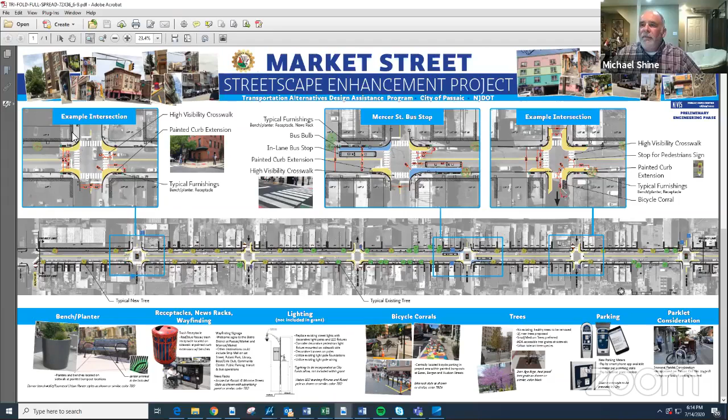What we did on this brochure, on this board, is we have an example intersection of the 2-way traffic. We have an example intersection of the 1-way traffic. And then there's a unique one here with the bus stop at the intersection. So we'll show you a typical of each one, and first we'll start with the 2-way traffic intersection. If I can zoom in here.

So the example intersection that we show here - a couple of the things that we looked at for this intersection is there's benches here. They're small in scale, but there's benches. There's trash cans at each corner. There's a planter, we'll get into the trees. There's also tree replacement up and down the corridor.

At this location, what's shown here with the yellow highlights are what we call bump outs. The purpose of the bump out is to reduce the crosswalk distance for people crossing. It's safer, and it also provides a traffic calming feel, forcing people to slow down through the whole corridor and providing more safety for pedestrians.

Charlie, if you want to jump in and add to that. Yeah, so what you're looking at on screen, in yellow, are the painted bump outs that Mike was talking about. You'll see on each corner we'll have a bench, a trash receptacle, and planters located on each one.

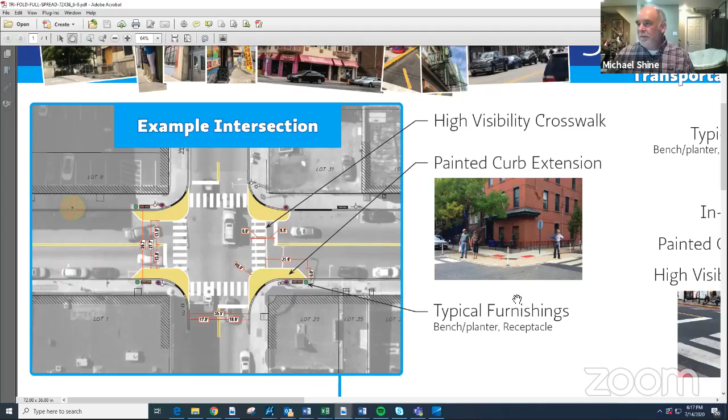And there's 3 locations that we have the two-way traffic. If we move over to the one-way intersection that Charlie was talking about, this is where the bump outs wrap around to the side street. These are a couple of the locations where we plan on putting some of the bike racks. It's off the main thoroughfare, so a little bit safer for the bicyclist, and the bump out can be used as a bike corral lay-down area as well.

Right now we're showing these bike corrals, that gray box, at 3 intersections, and in each case they're on a one-way street location, but they're spread throughout the corridor to provide opportunity at different locations for people. This one depicts about 8 to 10 bicycles, so at least we'll provide some storage, because the sidewalk area is so limited along Market Street that we're really trying to provide somewhere people can bring their bikes and not constrict the sidewalk in any way.

So you'll see this is one of the one-ways here where we have a bike corral shown as well. But again, here you'll notice there's furnishings at each corner, as well as new crosswalks and striping, and again, the curbing doesn't really change in these examples and what's proposed.

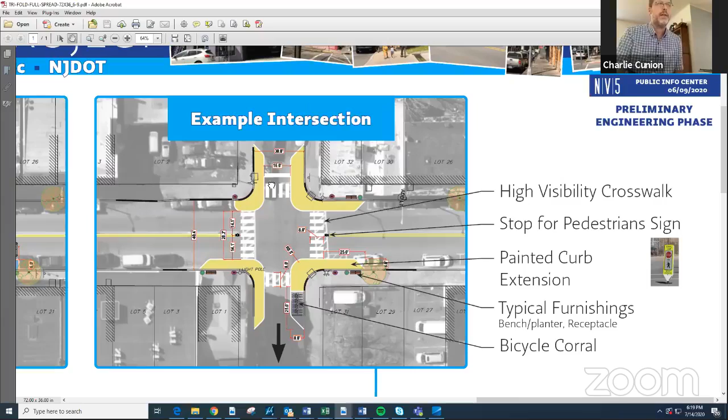The third example we have here is at Mercer Street, where there's a bus stop. On this side of the road, the existing bus stop is here. We're proposing to move it to the other side of the intersection, and also to have an in-lane bus stop as opposed to pulling over against the curb area.

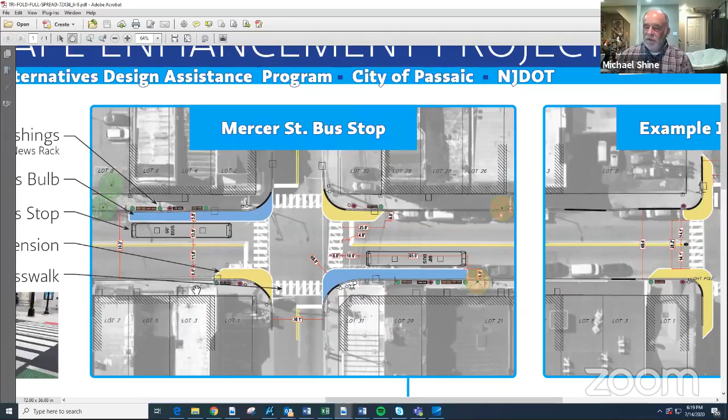The far side bus stop is a preferred stopping location, so that's the reason for the relocation of the southbound bus to the far side of the intersection. We're providing some additional space there for safety. Alongside the bus stop, there's a little more ample room for furnishings, which gives some breathing space for people on the sidewalk as well.

Again, you'll notice just the painted bump outs in this location. We've got a 2-way street for Mercer, so they don't really wrap around in this location.

One of the other things we want to mention is that as part of this project, at each corner of the intersection there are handicap ramps, ADA accessible ramps, and part of this project is to review them and make sure they're in compliance with the Americans with Disabilities Act guidelines. That has to do with slopes, the way slopes go from the road up to the sidewalk, and also where they're located for crossing the intersections. So that's another added piece of this project, to improve or bring up to standards any ramps that right now are insufficient.

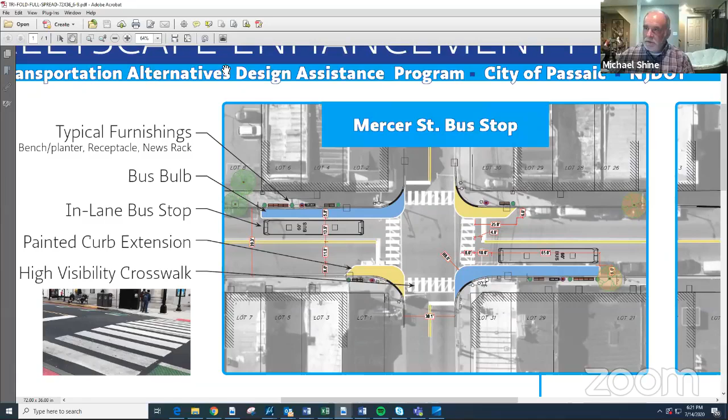If I expand back to the overall plan, the other thing is along the whole corridor—I'll zoom in this area—you'll see this series of trees. What we did is we went through, and there are a lot of locations where there's existing trees or at least box outs on the sidewalk for trees. Some of those spots are empty, some trees are fine and some aren't. As part of this project, we're looking to replant those areas that right now have either dead or empty spaces, no trees at all, and fill in the gaps to make it look uniform throughout the corridor, giving a natural look with trees and shade as part of rejuvenating the corridor.

I think there's several blocks like this one here that has no trees in it, and then other ones that have a lot. So we're trying to balance that out, and that'll be incorporated as part of this project. As I move through the corridor, you can see these orange circles are new trees, and the green are the existing trees. In these first two blocks, there's only one tree, so we're looking to add some of that to bring some color and rejuvenation to the corridor.

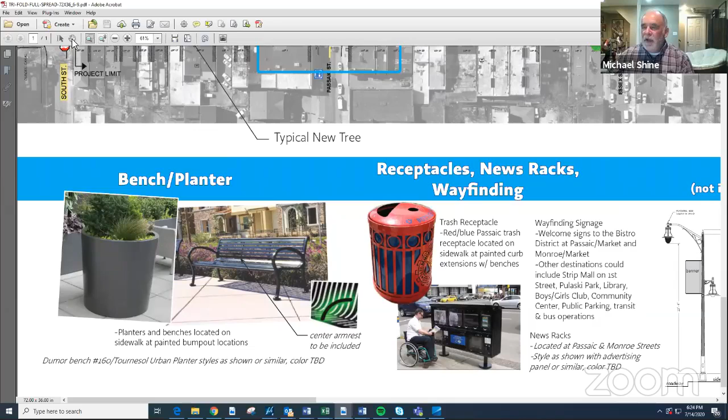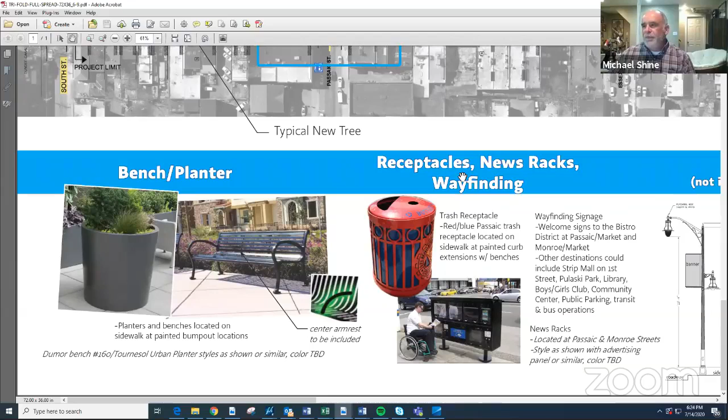Some of the site furnishings we've already gone through with the city, and again this is open for discussion. There's planters, some benches, and trash receptacles—there's some out there now that the city is standardizing. Really cool name to these, the Spider-Man cans we learned they're called, based on their color, which has the city logo on it, so we'll incorporate those to keep that consistency going through Market Street. For the news racks, the idea was maybe instead of having separate ones, have one that houses various newspapers instead of separate racks all along.

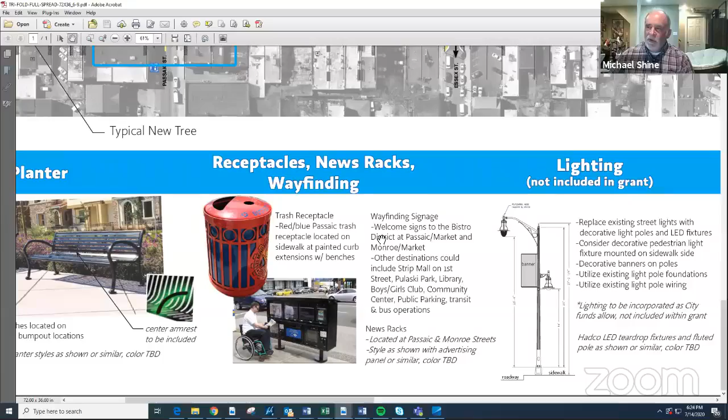There's existing lighting right now that is up to standards. We're looking at maybe adding some pedestrian lighting. Denise, you want to touch on that a little bit with the grant and how that works?

As part of the grant, there's a study to do lighting, and there was also some additional grants the city was looking at to upgrade lighting. We'd be looking at pedestrian scale lighting along the corridor. The roadway is already lit, and these would offer the opportunity to put banners or seasonal signs, to add some color to the area.

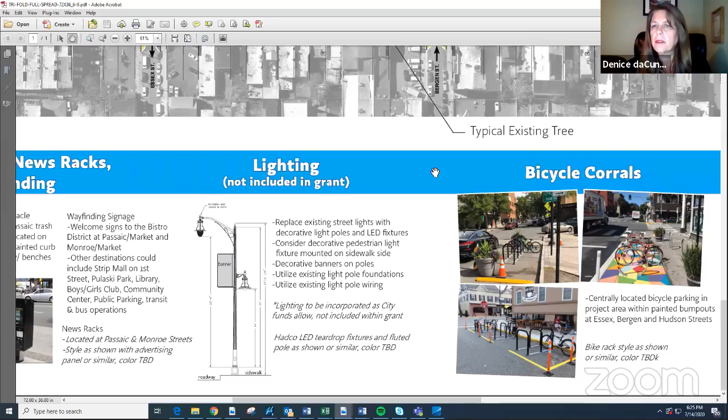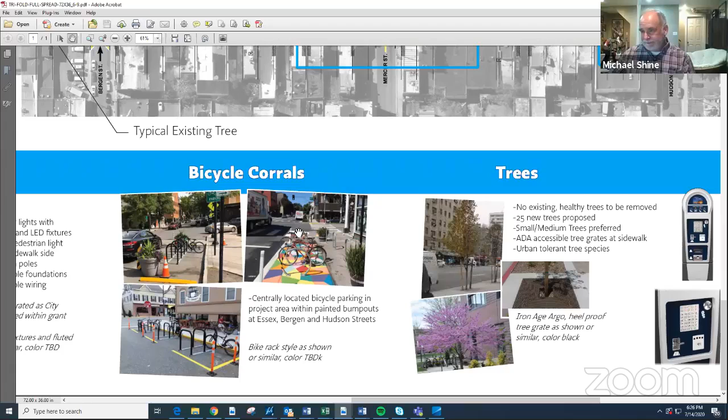And then the bike racks that we talked about at the various intersections on the side streets—there's a few different types, but that would be essential to this redevelopment. Other trees we talked about—again, there's some healthy ones, some not so healthy ones, and some that are missing.

The parking—I know the city is also in the process of redoing parking meters within the city, with a mobile app that would be in conjunction with these meters. So you would actually use your phone to go through and pay for the parking, as opposed to using cash, though I believe these have an option to still pay by cash. But the city's going to the mobile app, so we'll incorporate these to be consistent with the rest of the city improvements.

And then seasonal parklet consideration—before COVID it was seasonal, but now it seems like there's more and more of this happening, even on a temporary basis. So that's being considered by the design team to see ideal locations where that might be possible. Again, we're trying not to take away any parking, trying to keep safety, so there's a lot that goes into the consideration of the location and also what furnishings are used.

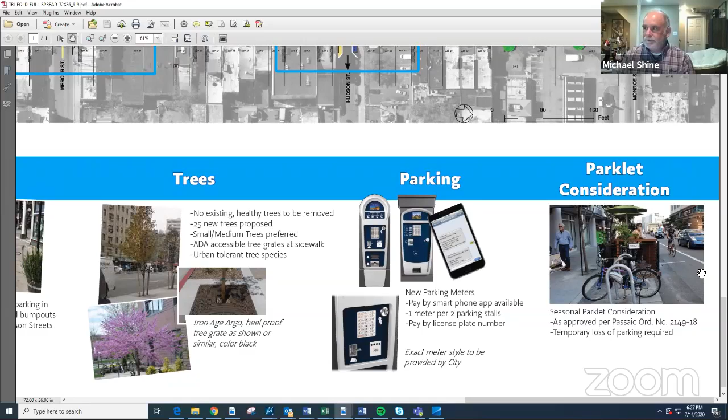So that's the project in a nutshell. I don't know if anybody has anything to add, or if we just want to open it up.

We can open it up to questions. If you see any questions come in, I don't see them, Mike. I'm not sure if you're seeing them—if anyone has any questions, they can ask them now. Yeah, I don't see any. I would think they'd pop up on this comments box on the Facebook Live, but I don't see them. I see a couple here, Mike. You do? Where am I looking wrong? Well, not sure about that, but I could read them off if you like.

Sure, we have one from Father Jack Custer, St. Michael's Cathedral. He says, around Bergen and Market Street, St. Michael's Cathedral provides and maintains trash receptacles, which an employee of ours empties daily.

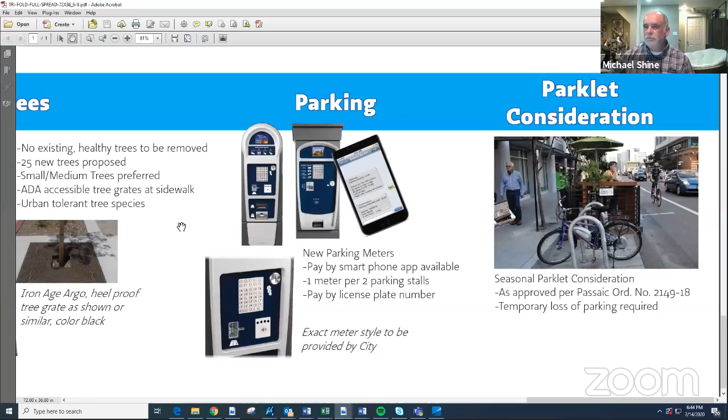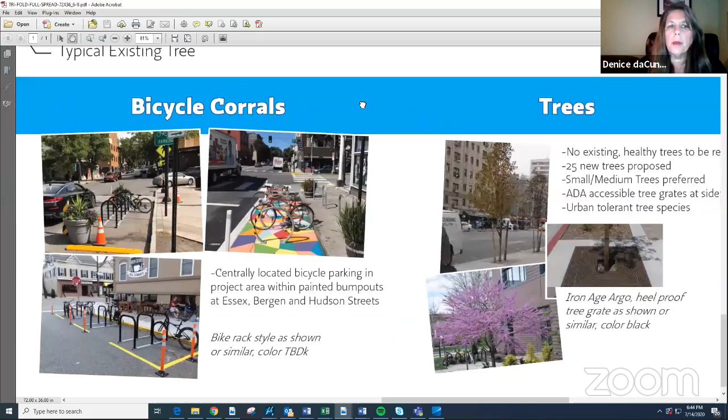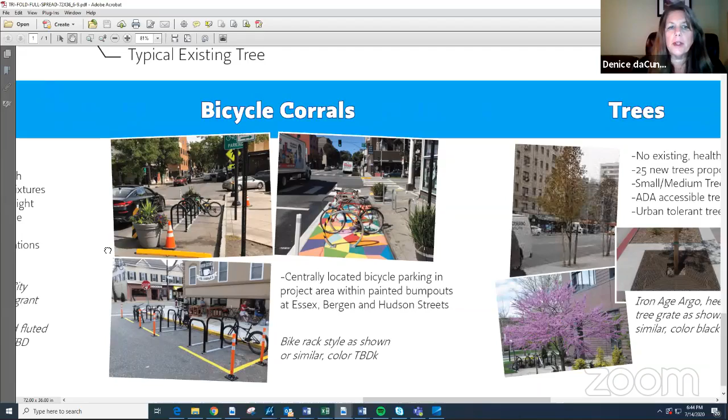Just to add, outreach will continue throughout the process. There'll be a 2-week period now where we're asking for input on the current presentation board, but in final design, public outreach will also be included, and we'll do a formal public information center with every intention of being face to face at that time. The city has also put out flyers, so if there are any questions on the project, it's really an open process.

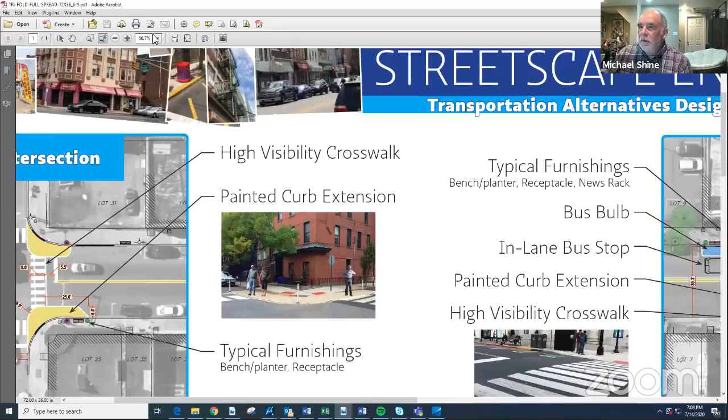This is an example of a one-way intersection. The bump outs, the painted curb extensions, do extend around the corner. There's room for them, again shortening the travel distance for pedestrians crossing the block. Also a location that we identified for the bike corrals, kind of tucked away, safe. Charlie, if you want to expand on this one a little bit.

Yeah, so we're able to extend the painted area on the side street, which is nice. You can see how short that crosswalk is, and just in this graphic alone, it definitely shortens that time up. Also, the bike corral shown in the bottom right, that gray rectangle, houses about 8 to 10 bicycles, and we've got that integrated into the overall corridor in 3 different locations right now.

I think Kevin mentioned a good point earlier in one of the questions as far as feedback. If anybody has any additional feedback on the best locations or a preferred location that they feel works for their daily use, that'd be great to get that kind of feedback today.

Again, you'll see here up on the sidewalk the new furnishings proposed. The little red circles are Spider-Man cans, as Mike identified them earlier. And we've got benches and planters as well here in this location.

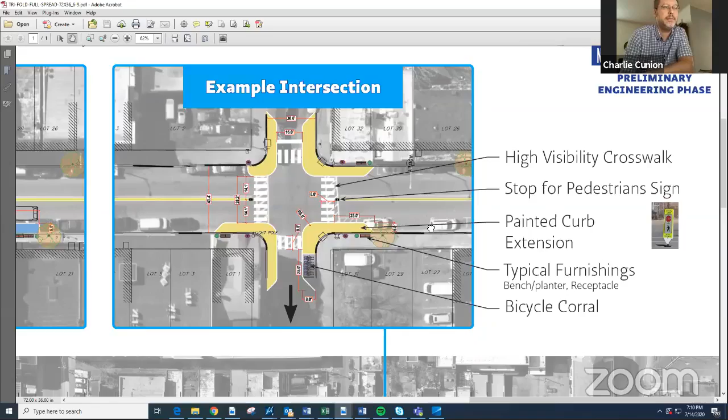Then at Mercer Street, we have the bus stop. The one in this direction right now is on this side. We're proposing to move it to the other side of the intersection and have an in-lane bus stop.

Charlie, you want to hit that a little bit? Sure. That's a preferred location. The far side stop for transit is a preferred location by transit. It's also a safer application for a problem that can arise when a bus stops in advance of a signalized intersection and someone wants to go around it. They can run through the intersection kind of blind, and there's a chance that there could be an accident. Somebody trying to cross the crosswalk in front of the bus could get hit by a passing car trying to get around them. So they like to have the bus stop on the far side so the crosswalk is in clear view of people behind the bus as they approach. It's just one of those things we thought we'd take advantage of while doing this work, and kind of correct that.

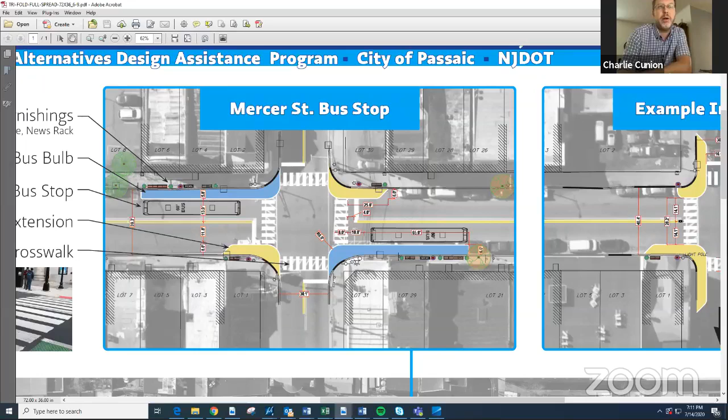You'll see it does provide a long space there, offset from the curb, where that was basically the parking strip, but we're not removing any parking in this location. Also, we've got a little bit more opportunity for benches, showing the news rack at this location, as well as some planters and some benches and so forth. This spot provides a little bit more buffer, since we have such a long painted stripe for the bus zone area. There's a little bit more buffer space on the sidewalk, so we can get a few more benches up there, and it's more comfortable for somebody to be up there, with that separation from traffic.

Charlie, I see one of our incoming questions here is, what is a bus bulb? A bus bulb, that is that blue defined color that you see there, that painted space. That's a bus bulb. Sometimes they're also curbed with sidewalk, and it's kind of a bump out or a bulb out, as you might refer to it. In this case, we're only doing a painted bus bulb. But it's a space that moves over for access onto the bus itself. It kind of bumps out from the curb.

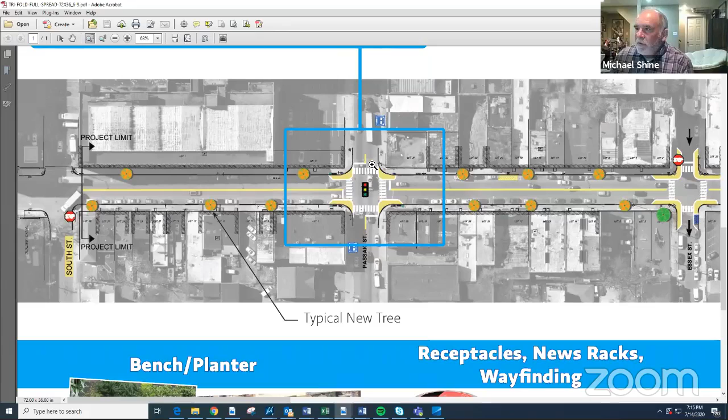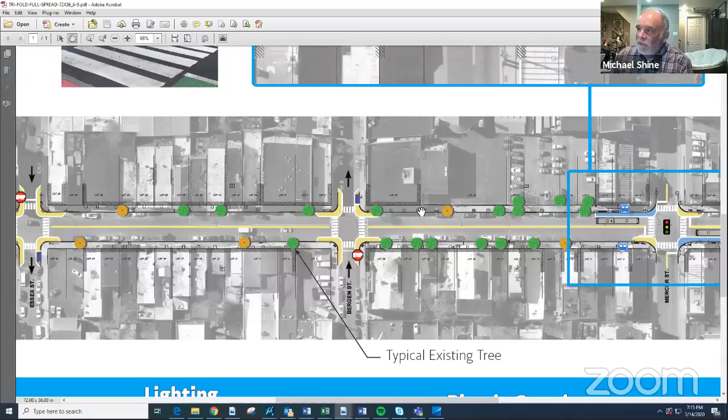If I zoom back out here, along the corridor, I know we mentioned it a couple times, but for anybody that's new, we're trying to add some trees. As you can see along the corridor, the green symbols are existing trees, and the orange are new trees. There are several blocks that have no trees right now that we're looking to plant and spread out along the corridor. As you move along Market Street, mid-project, there are a lot of existing trees, but it's really at each end of the corridor where there's not as many. So part of this is to add trees, to enhance the area and go hand in hand with the new improvements.

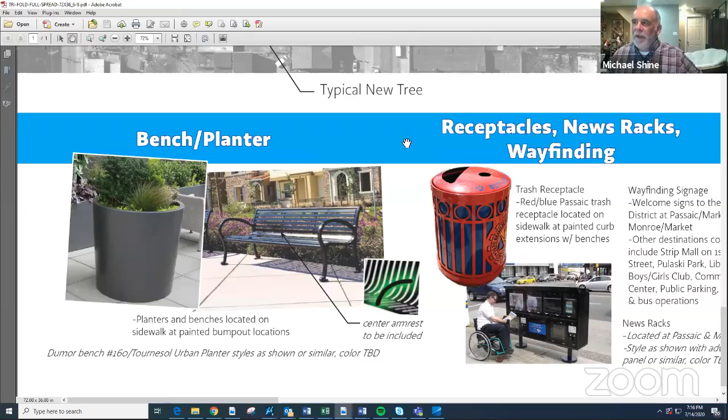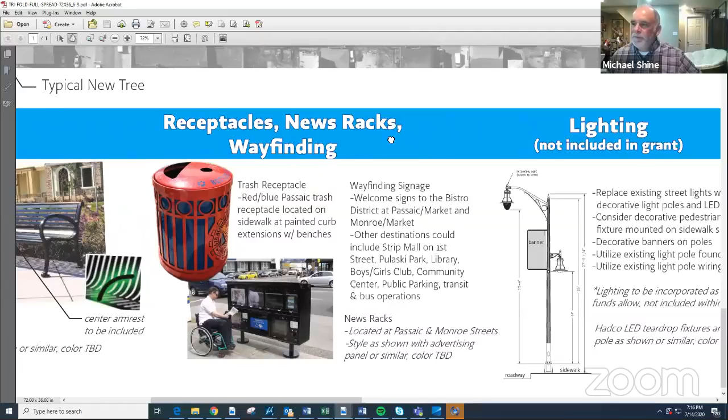These are some of the site-specific furnishings that we've looked at and discussed with the city. Planters, benches, the garbage cans, the Spider-Man cans, it's my favorite, that has the city logo, very neat. Centralized newspaper racks, as opposed to individual racks all separated throughout the corridor.

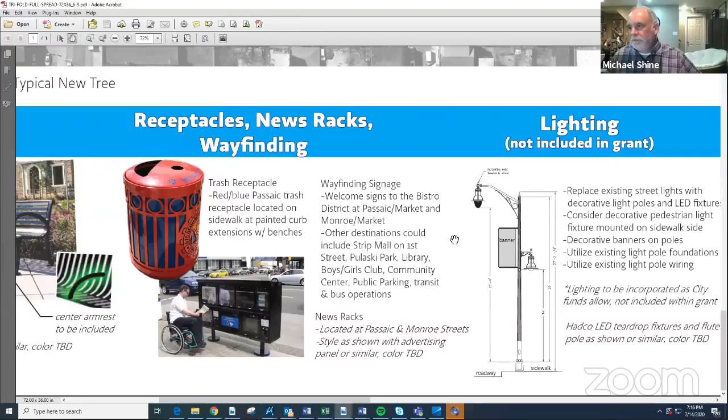The lighting right now along the roadway meets all the standards for lighting. We're looking, depending on funding, to add possibly pedestrian lights, if not now, in the future. The city is looking at that to enhance the sidewalk and brighten that area. It also has the opportunity to add banners that can be for holidays, for fairs, for street fairs, or any of that kind of advertising.

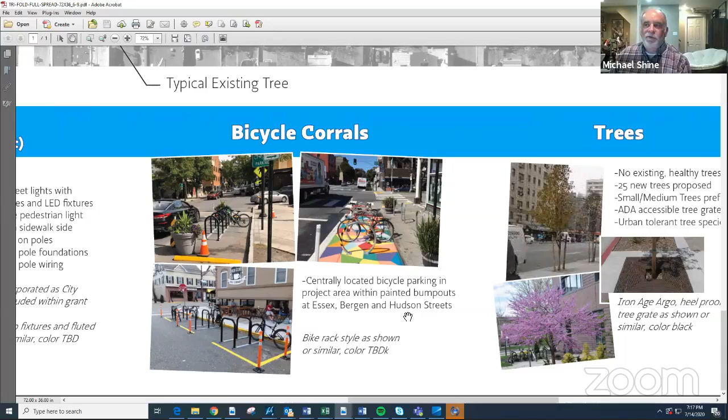And then here's the different bike corrals that can be used at those locations we identified on the plan. Several different types, and that's another reason for the Public Information Center, to try to get some feedback from the property owners and business owners on preferences.

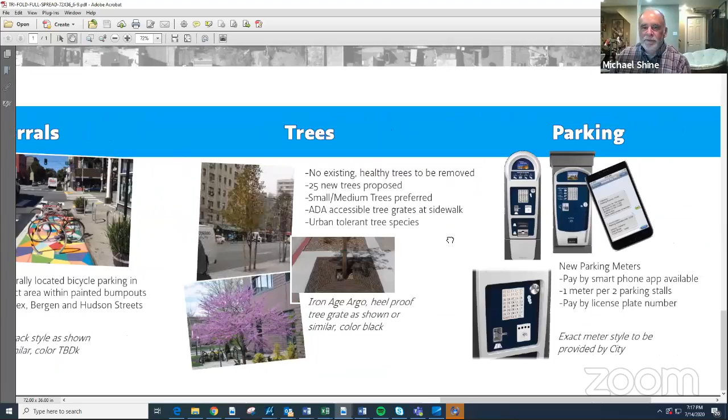The new parking meters are handled by the mobile app that the city is starting to unveil at other locations within the city. And consideration for parklets, whether it's seasonal - well, I guess it would have to be seasonal - and again, this would be strategically located as to not impact any of the existing parking.

Anything to add there, Charlie? All right. Kevin?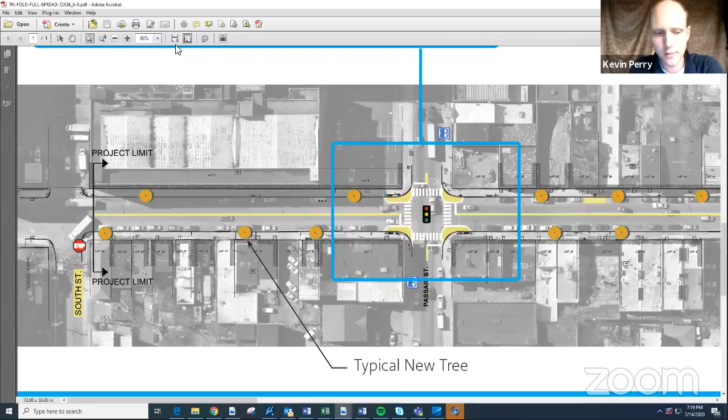So here's Passaic Street, and this one does not have a bicycle rack or bike corral. It's because Passaic Street has two-way vehicular travel, so the curb extensions we're proposing do not wrap around the corner. Whereas in this example, the cross street is one-way travel, so we have space along the face of the curb to wrap the curb extension all the way around the corner, creating a safe little nook where we can place the bicycle corral. So that's where we arrived with it.

We certainly welcome any input that would help us redirect the location of these bicycle corrals to a more usable location.

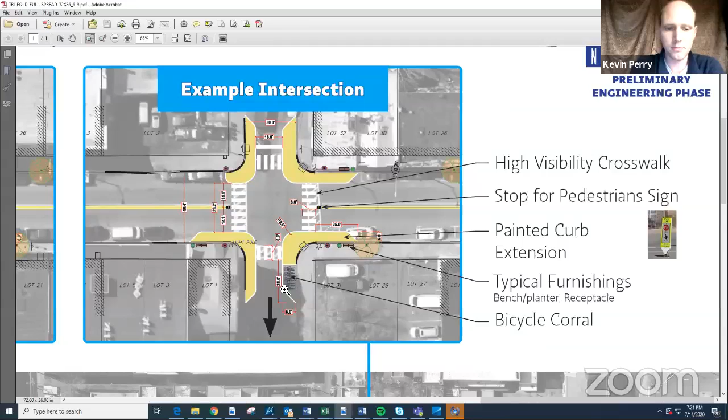I'll zoom in and walk through the plan a little slow so people can see.